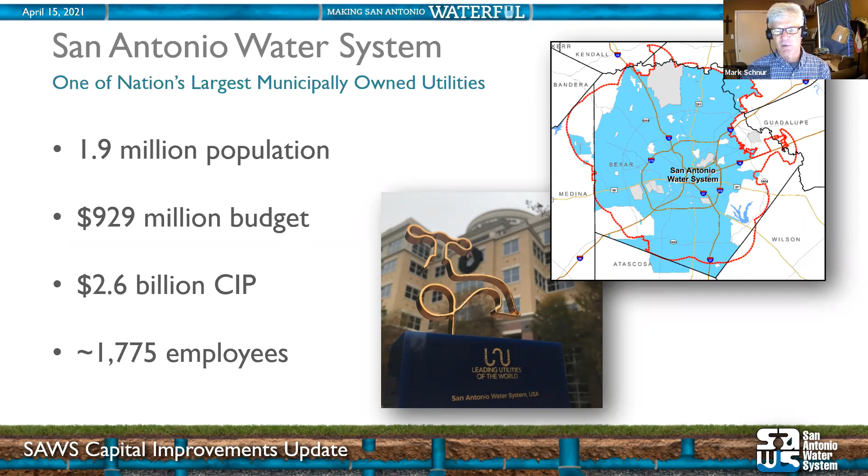A little bit more about our infrastructure. We have 13,000 miles of pipe, that's water and sewer pipe. 182 wells, mostly in the Edwards Aquifer. 117 water storage tanks, some elevated, some on the ground. If you drive around, you won't go very far on any of our streets or highways without seeing one of our water tanks. There's 154 lift stations, and most of our system runs north to south downhill towards our treatment plants.

You see the Steven M. Clouse treatment plant on the right down at the very southern tip of Bexar County. But the lift stations, when there's a rise in the pipe or we need to go around or over something, we put in a sewer lift station, and that keeps the wastewater flowing downhill. There's 3 large treatment plants. I mentioned the one on the right is Clouse, formerly known as Dos Rios. We also have one at Leon Creek and a Medio Creek treatment plant, and those take care of all the wastewater from all 1.9 million people.

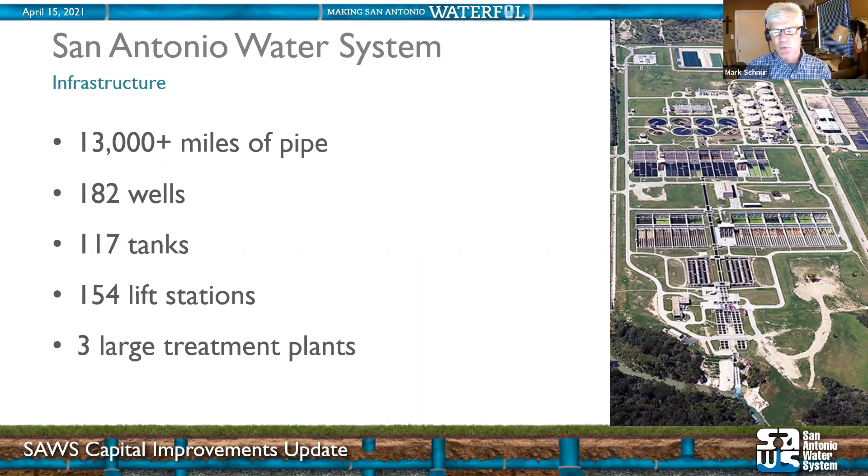Project controls, that's my team I'm on. We live in engineering and construction. We focus on scope, schedule, and budget. In other words, keep projects moving. We attain and sustain a high level of project success by focusing on those project schedules and budget, maintaining the scope to try to minimize scope creep, and meeting our stakeholder expectations. Our stakeholders are both in the organization with our operations staff and then outside. The city of San Antonio, indeed, every citizen that we serve is one of our stakeholders.

We do leverage technology quite a bit. Since I think 2012, we've implemented and used constantly our contract and project management system, CPMS, that we have for contracts. We can quickly determine the status, asset information on each and every piece of sewer pipe in our system to meet our EPA consent decree. And we also use Primavera P6, a project schedule that interfaces with some of our other software, namely Tableau. We have a Tableau dashboard that helps us visualize through pretty cool charts and graphs where we're at on any given project or any piece of sewer main in our system. So we heavily use technology.

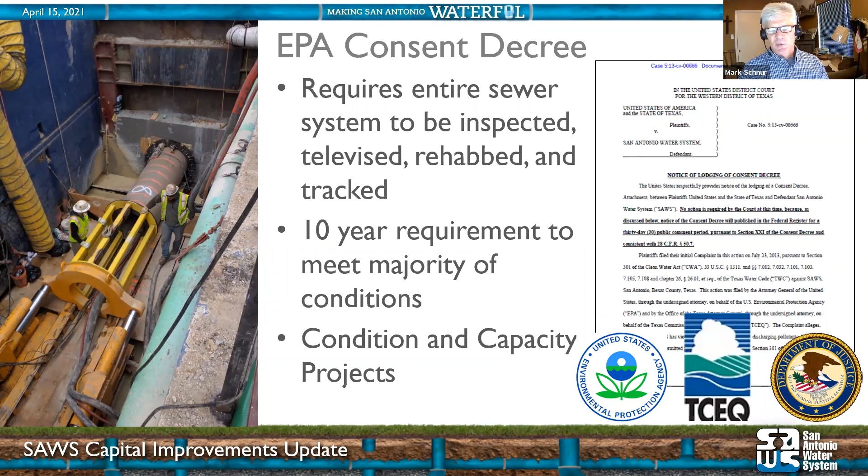So the timeline, as you saw, started in our first full year, 2013. In 2025, we see it winding down. However, as I mentioned, the capacity and condition remedial measures projects will be finished by then. But the CMOM, which, if I recall, is capacity, management, operations, and maintenance, will continue well into the future.

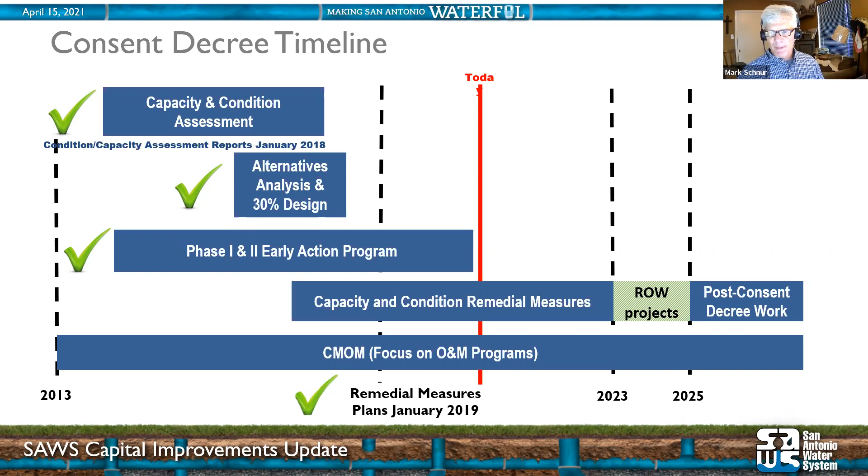One of our big projects right now, you may have heard of this. It's the most costly and complex sewer pipeline project in our history. We have over 5 miles of up to 104-inch gravity sewer main, at a depth up to 140 feet. If you notice the graphic on the right, it goes around Lackland Air Force Base, along Highway 90, down Southwest Military, and ends up south of the base. We tried going through the base, but it was obviously difficult going through a military base, especially one with an active runway. So we finally worked up a solution with a lot of help at very high levels in the federal government to go around the base.

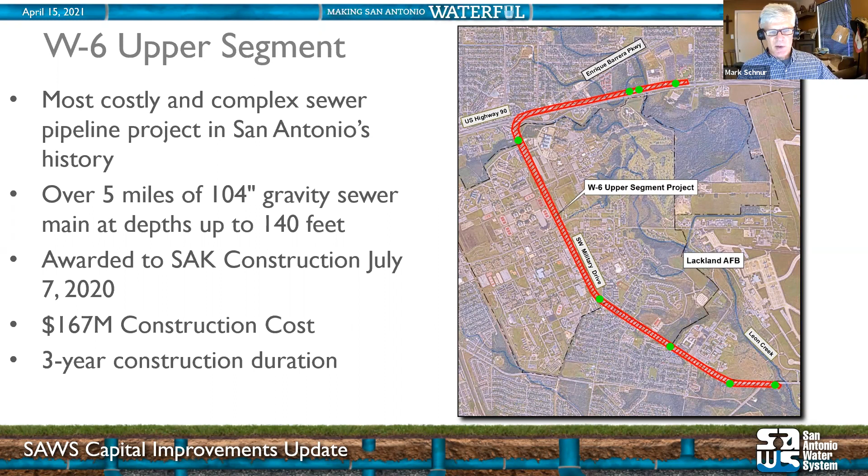The green dots are tunnels where they've bored tunnel shafts down up to 140 feet to work on the pipe down that low, because obviously you can't, and wouldn't want to, dig a trench 140 feet down. So they're doing tunneling with giant tunnel boring machines, and we're over 30% done on that project. We're ahead of schedule, which is a really good thing, and we expect that progress to continue so we get it done within that 3-year construction duration.

It's a $167 million project. There's some pictures you can see. In the upper left, that's one of the tunnel shafts. That one doesn't look as deep, but some of them are. On the lower left, you can see one of the tunnel boring machines. And then some other cool pictures with the railroad tracks underneath, in those sewer pipes where we're installing the new sewer pipe. And people standing by, in that center right picture, a very large tunnel boring machine. That guy in the foreground is our Chief Operating Officer, Steve Clouse. He's my height, if not a little taller, at 6 feet, so you can see the TBM is probably a good 10-foot diameter machine.

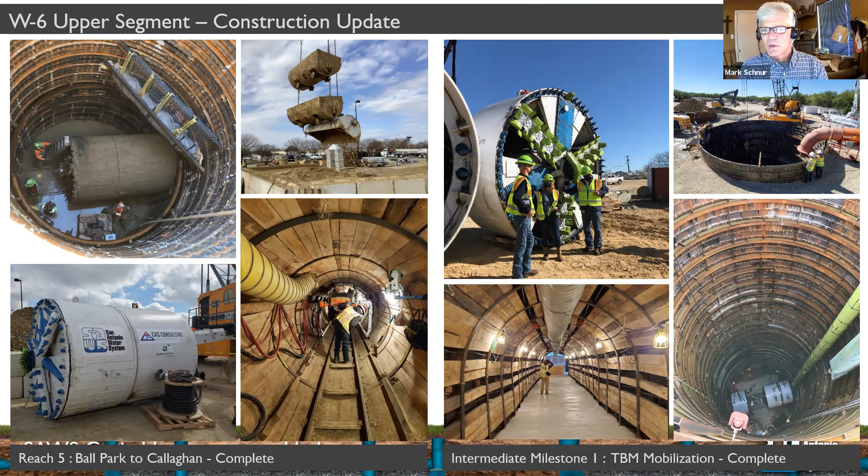Well, let's see, let's move on. Okay, some more projects. I see there's some questions coming in, and I'll take a moment here and answer those.

WRIP, Water Resources Integration Pipeline Phase 2. That one went all the way around the west side of the city to bring water up from one of our production plants down on the south end, and also down there is our aquifer storage and recovery site, to bring water up to some pump stations on the west side and up near Anderson Pump Station, close to the northwest side, to feed a very rapidly growing part of the city.

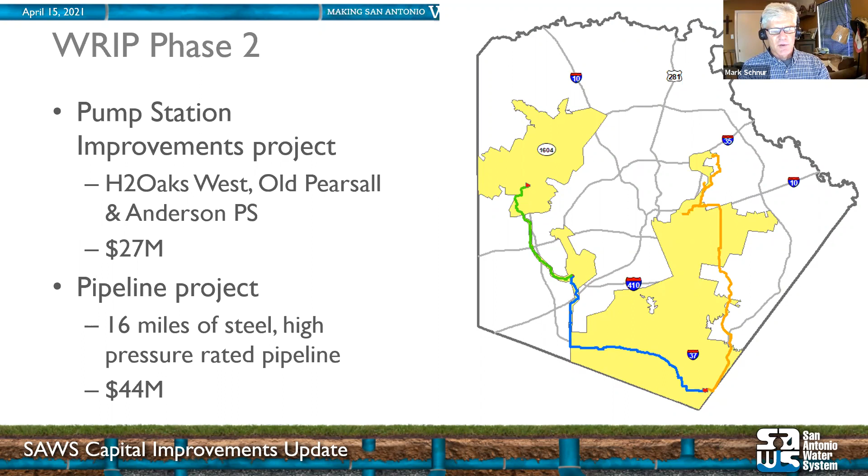There was 16 miles of steel, high pressure rated pipe at $44 million cost, and then a couple of pump stations that we built for $27 million. So again, a large project.

If the moderators don't mind, I'll quickly answer a couple questions. How much of the sewer main network still needs to be rehabbed? I don't have a quick answer off the top of my head, but we're over halfway, and that project will continue. We're making great progress. The EPA has even publicly congratulated us on a really good program to meet the demands of the consent decree.

How often do sanitary sewer overflows occur in San Antonio? Right now, since it's been so dry, not very often. Typically rain will cause one, and obviously blocked pipes or poor condition pipes will cause one, but normally with low flows they don't occur very often. I don't have numbers off the top of my head, but the incidents have come down dramatically in the past few years. If you look at our website, we post when one occurs, since we're required to by law and it needs to be public information.

What do we do with all the dirt from the tunnels? I don't know for sure, but a lot of it, if it's not contaminated, they truck it away. I don't know where, but if it is contaminated, then we have to take special precautions with that.

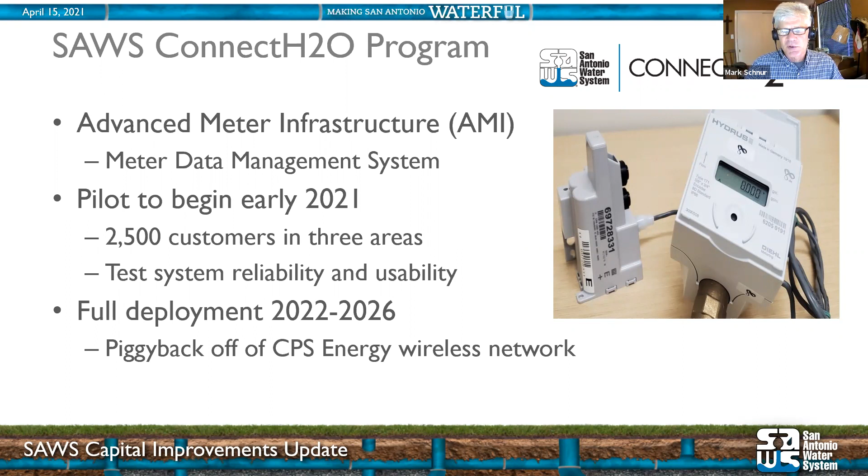It'll be pretty neat when fully operational to piggyback off the CPS Energy wireless network, so we didn't have to build our own. It will give us terabytes of data, so I anticipate we'll cross-train or hire new staff to manage and make sense of it. I'm pretty excited about that project—it's funded for construction in 2022, so we'll see that coming out next year.

Okay, the wastewater master plan. I mentioned our 4 treatment plants, shown in green there. The Salado Creek plant is decommissioned, though we still own that land, and at present there's not much infrastructure there. The other 3 operational ones are Dos Rios—actually named Steven M. Clouse now—Leon Creek, and Medio Creek on the far west side.

That master plan evaluates the existing conditions and infrastructure at all 3 treatment plants, which we call water recycling centers. It'll give us a solid capital improvement plan for the next 20 years, which, from putting together our capital improvements plan for many years, we really need for better stability and to keep the infrastructure well maintained and operational. For instance, the Dos Rios or Clouse treatment plant, our largest, is about 25 years old, and infrastructure needs to be maintained over time to continue leveraging technology like SCADA systems.

That plant averages about 80 million gallons a day of wastewater, so you really need robust infrastructure to treat it all and meet environmental standards. The master plan is expected to be finalized later this year, and hopefully it'll provide input for our capital improvements plan for next year and the following 20 years after that.

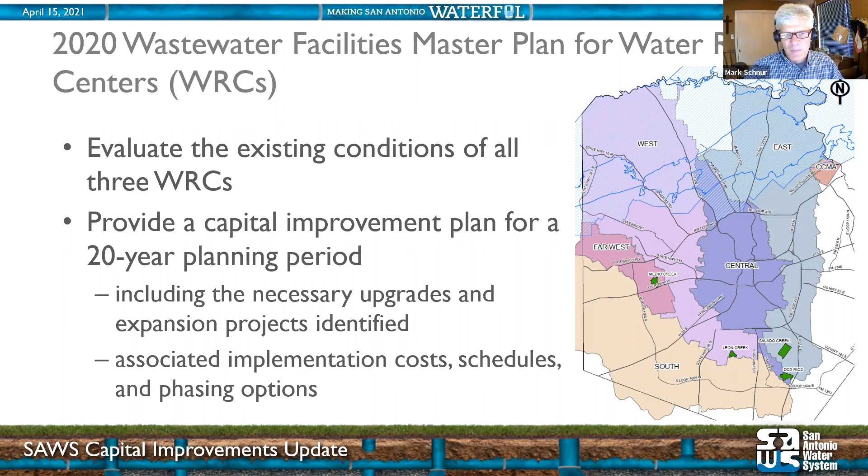And we don't just do wastewater, we do water also. This program is actually in its final stages now. We're actually implementing some of the projects that came out of it, and it was to do a water main rehabilitation, risk-based rolling 5-year capital improvements plan.

We looked at city streets. Well, our consultant looked at city water mains throughout the system and said which ones are the highest risk for failure, and they came out with some good projects that we actually have. We're designing some of them right now. We'll see a lot of them go to construction in the next year and the following years.

This is pretty nice. I saw some of the presentations and looked at some of the models they built that used machine learning and field condition assessment, came out with useful life calculations. It considered triple bottom line of social, economic, and environmental. It gave us a risk score, the likelihood of failure times the consequence of failure times the redundancy, came up with a good quantitative risk score.

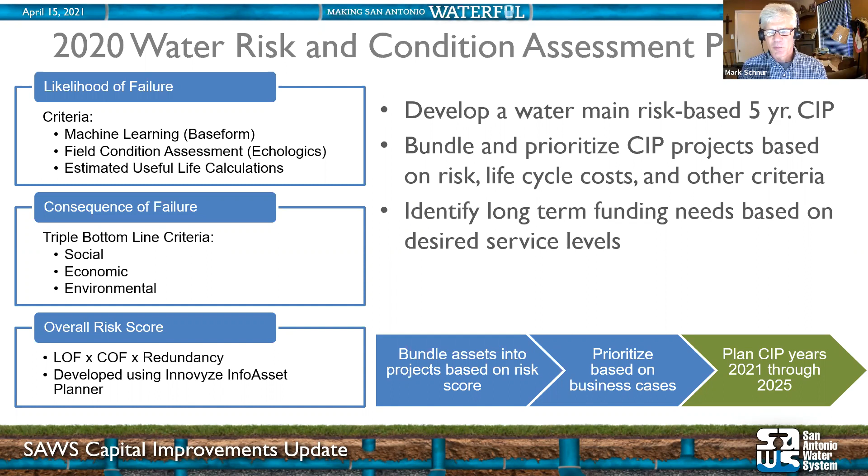And they used some cool software by Innovyze called InfoAsset Planner to come up with that. And that program is now giving us a really solid water main rehabilitation capital improvements program. So again, technology helping us identify the highest risk water mains in our system, and now we have a good program to implement in our capital improvements program to rehab those water mains.

Okay, so here's what I know you all want to see: dollars. That's our capital improvements program 2021 through 2025. It averages about $515 million. We're looking at some big years. 2020 was actually 600 million.

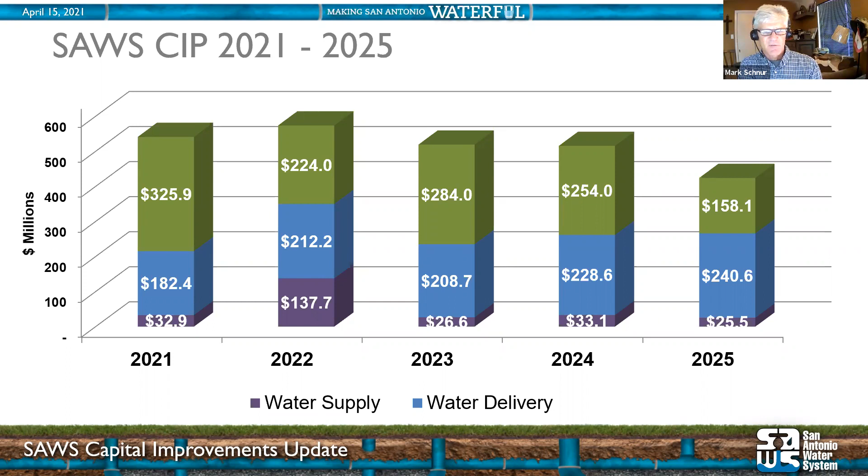Some of these, I think, we couldn't get Excel to put the totals at the bottom of the chart, but 2022 is right now sitting at 574 million. And if you'll jump forward a slide, I'll show you 2021, the year we're in right now that we're executing. That was 541 million, so lots of money.

Most of it construction with 486 million, and then about $20 million of design, and 70% replacement of old aging water mains and other infrastructure, and then 30% growth to meet a rapidly growing city.

Obviously, wastewater, 326 million to meet the demands of our consent decree. Water, 182 million for pipes and pumps and tanks, and then water resources, that was like the water resources integration program and other water resources projects. That's new water supplies, 33 million.

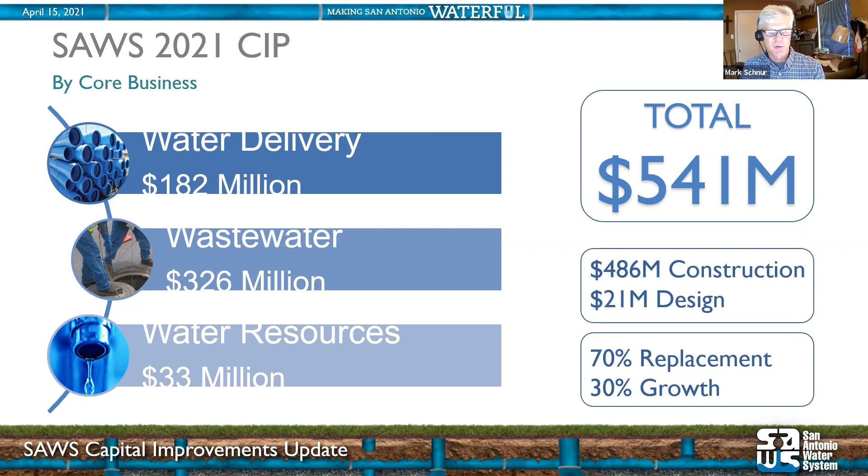So I'll go through each of those in some high level detail and some specifics on each project. Water delivery pipelines, that's obviously water pipes, 62 million. Facilities, about 79 million, that's pumps and tanks. And then governmental replacements, we do about 28 million along with the city, TxDOT, some Bexar County every year.

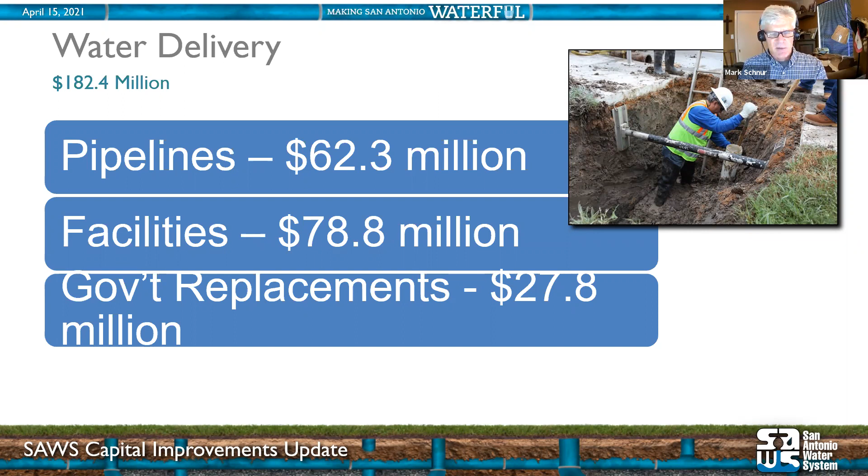So our infrastructure program is tightly integrated with the local and state governments, the roadways and all that they maintain. Here's a few projects. Turtle Creek number 3, tank and main, $35 million tank and water main. That feeds the medical center, obviously a very important area to the citizens here, to make sure that we give them adequate water supplies.

We are looking at removing chlorine disinfection from some of our key water pump stations, especially in developed areas like down on Market Street. Last thing anyone ever wants is a chlorine release, accidental chlorine release, which can be deadly. And so we're upgrading those to on-site sodium hypochlorite, a much safer solution to disinfect the water.

And then there's one of our water main replacement programs, 12 million for 4 aging neighborhood water mains.

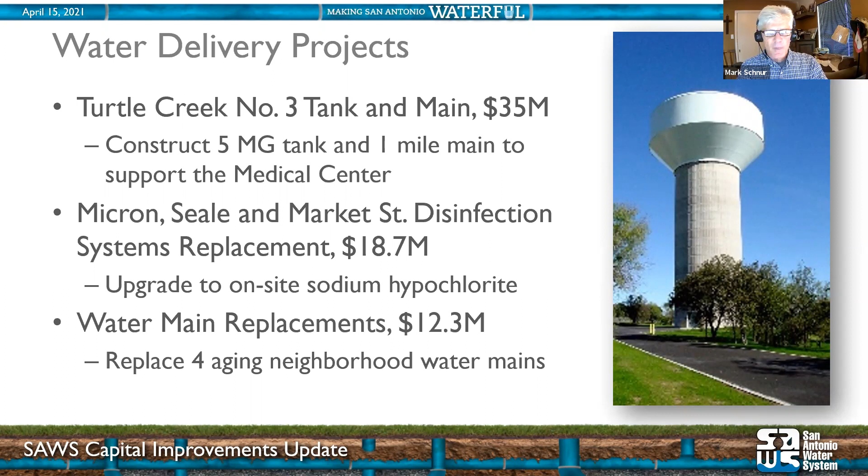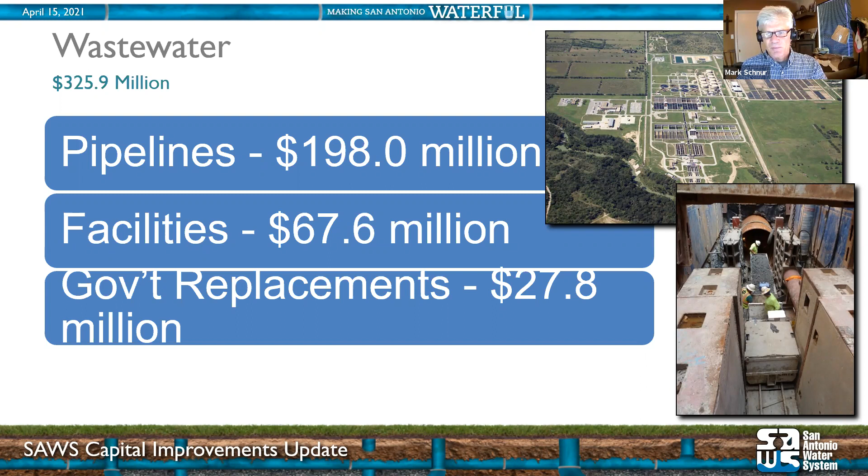So that's a big line item there to meet the consent decree, small and large diameter. That's a bucket of projects: inflow reduction to reduce the I&I, or infiltration and inflow, into our sewer pipes. When they crack or break or whatever, water flows in sometimes through manholes, and that is just more water we have to treat, and we don't want to, don't need to. So sealing up those pipes will ultimately reduce the amount of projects we have to do at our treatment plants to treat water.

And then CMOM, that's the ongoing work beyond the consent decree, 2025 and beyond, to continue to rehab old sewer pipes.

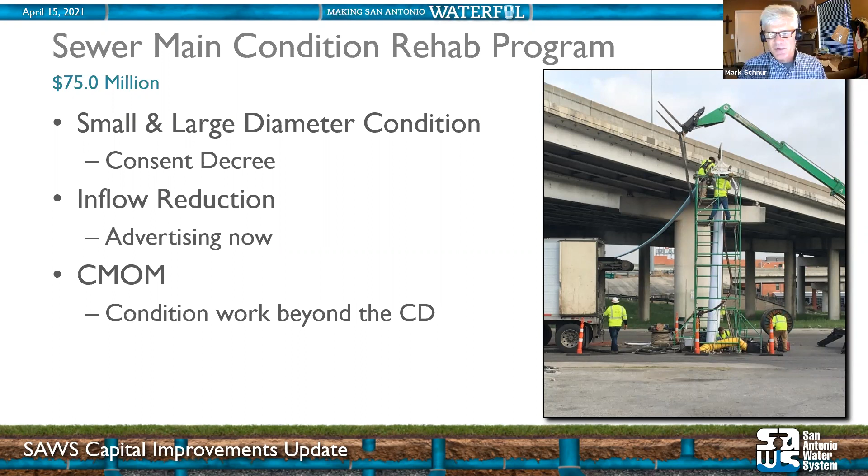A few more sewer main projects. W2, on the west side, in green, Eckhert to Bandera, is 2 miles of up to 42-inch sewer main. Some of these projects are advertising now too, so if you go to our website, I'll give that to you later, you'll see where you can look at those projects. That's $14 million.

E74 on the east side out there off I-10, $13 million. That's a 60-inch inline storage project.

The E54 sewer main, up north of town in that pink color, is about $32 million. That one was actually funded this year. It's a developer project, so there's a lot of hands involved. It'll probably slip to early 2022 award, but we will get that project out.

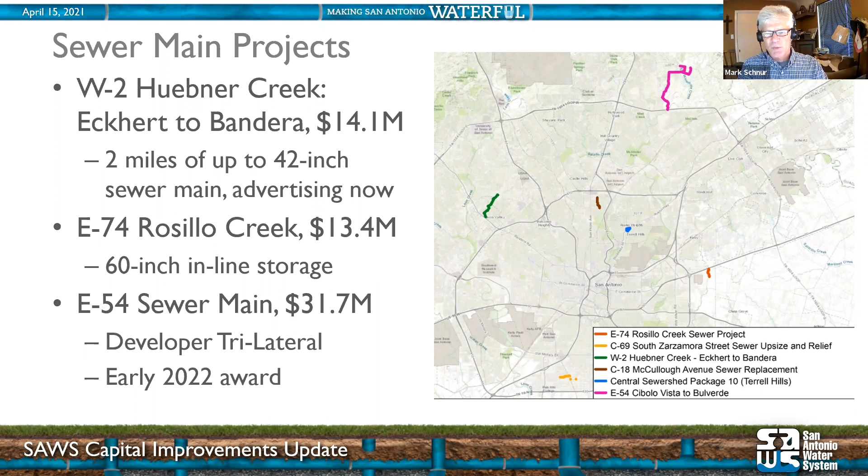A few more. C69 South Zarzamora, $3 million. The small capacity constraints, scattered around town some, are about $10 million.

C10 Terrell Hills, that's the small project there, the blue dot near Alamo Heights and Terrell Hills. Some old sewer mains, some of them I'm kind of familiar with because I live close to there. People built houses or garages over the top of sewer mains, which normally we don't allow, but it happened in the distant past, so now we have to deal with it. We'll probably move some of those out to the street to avoid disrupting any of those buildings.

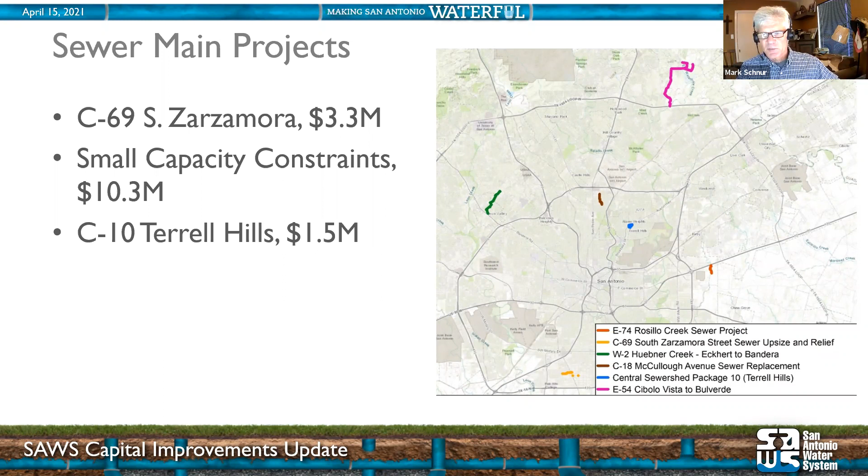So let's go to lift station projects. I mentioned lift stations earlier, about $12 million to rehab 15 lift stations at Port SA, Lackland. That includes SCADA work to network those into our automated systems so we can control it remotely. That's part of the consent decree required by 2023. And then another one, $5 million to eliminate a number of lift stations near Port SA, again required by 2023.

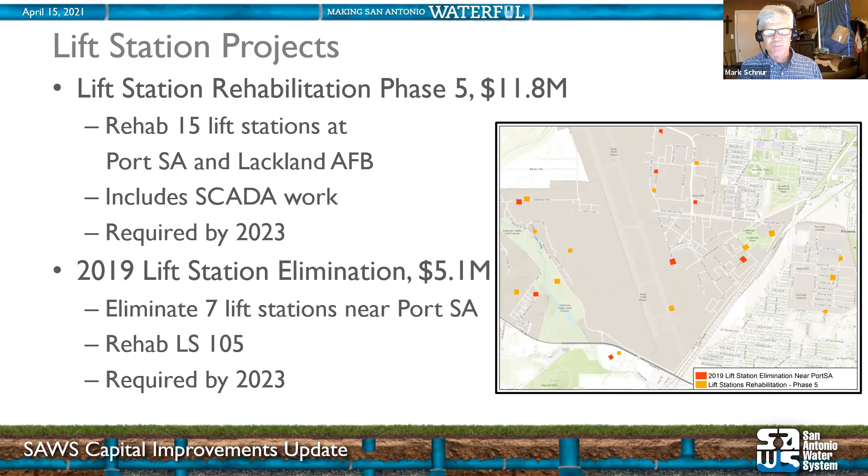Water recycling center, that's the treatment plants, $50 million, all at the Steven M. Clouse and Leon Creek plants, to do headworks and grit improvements. We're getting a lot of grit in the pipe, which is causing some early wear and tear to the infrastructure there. Digester mixing, there's very large anaerobic digesters there, and we need to upgrade some of those because obviously those don't get better with age.

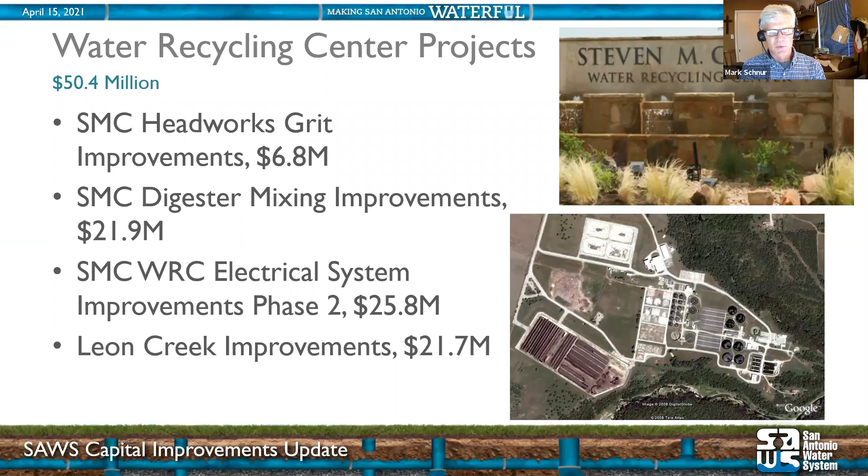Electrical system improvements, that project's been one we've been working to get out for quite a bit of time, to upgrade some of the old electrical infrastructure there, $26 million. And then Leon Creek, a number of different improvements to that treatment plant, the one you see in the lower right of the slide, $22 million at Leon Creek. We have to keep all of our recycling centers running well and fully capable, so we end up having to put quite a bit of money into those two.

There's an inside picture that looks like a spaceship of one of the digesters. I always like that picture because it looks kind of cool. That's the digester project for $22 million. Clean them, install new pump mixing systems, do repairs to the domes, liners, bases, overflow lines, and the electrical and SCADA work will all be done with that project, about $22 million.

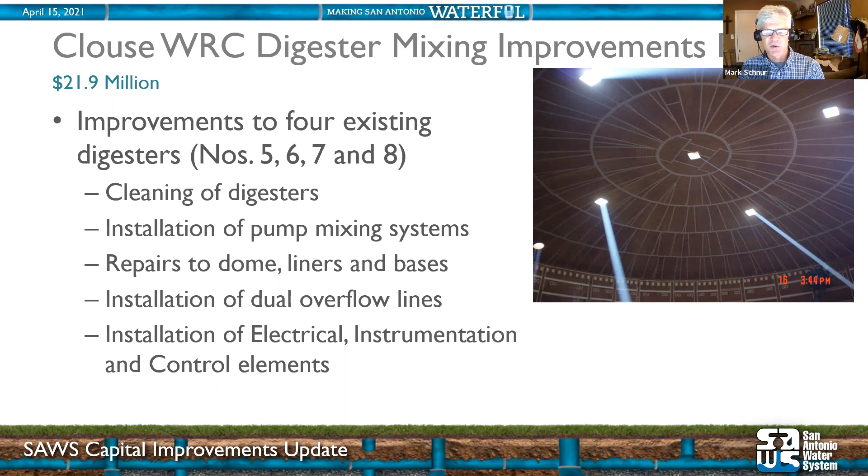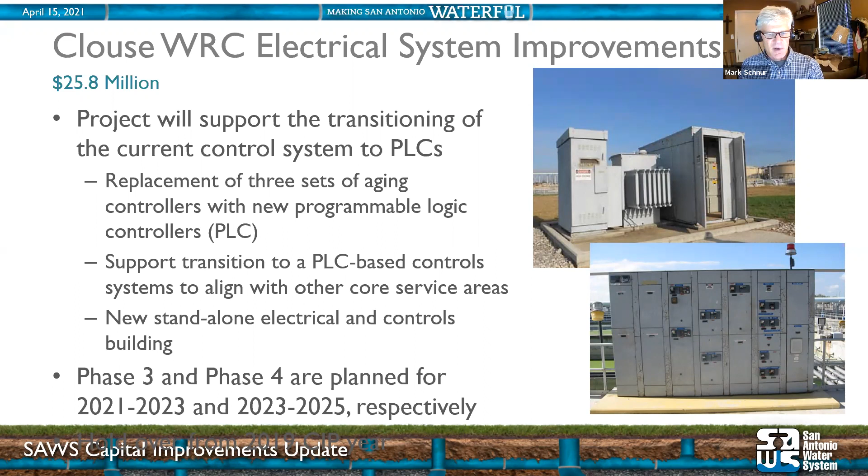There's the electrical system, you see some old duct banks and all that. Some of that is no longer maintained or supported by the manufacturers, so obviously it needs to be upgraded so we can continue to rely on it. We're transitioning those from the current control system to PLCs, programmable logic controllers, which will interface well with some of our other infrastructure and control systems. This is phase 2 of a 4-phase program that right now is planned to conclude in 2025, so there'll be ongoing work on that.

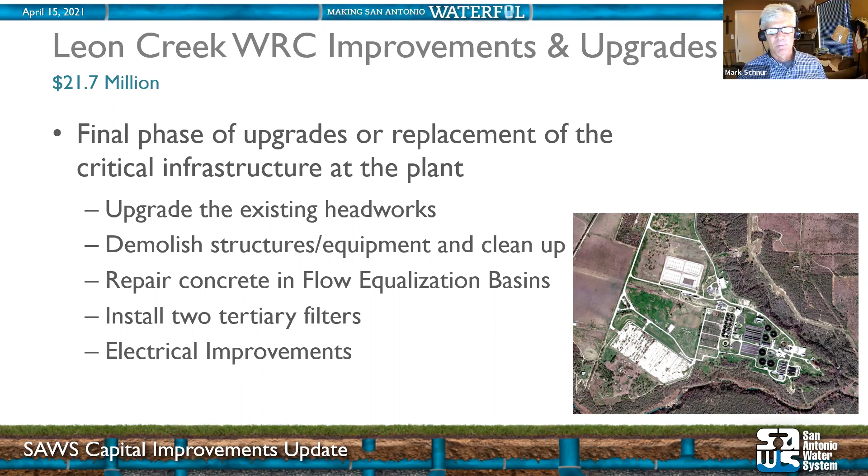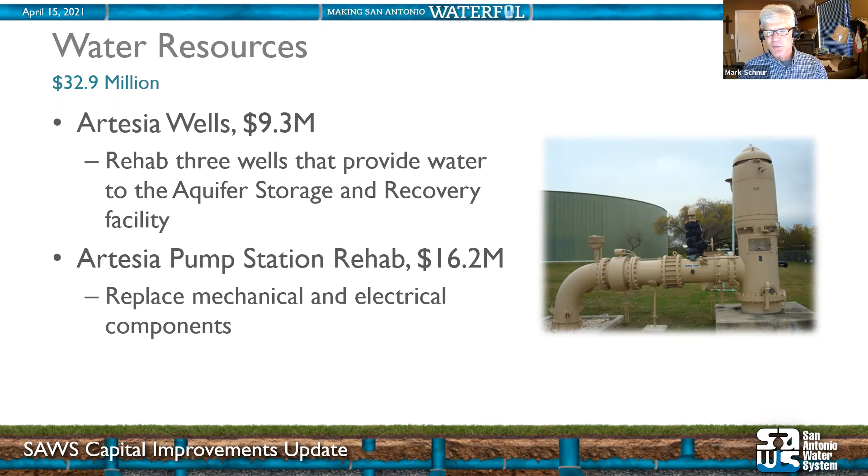I saw a question about Vista Ridge, and we just finished the Vista Ridge project. How does our program integrate with it? Well, it's all integrated. All of our water sources are closely integrated and controlled remotely too. So we don't just bring on one water source that feeds one small area of customers. It's all integrated throughout the system.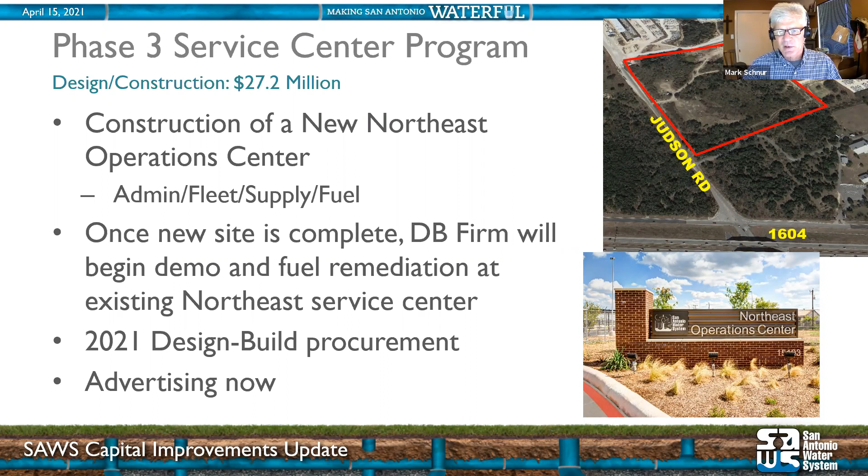Obviously you can see the site needs to be cleared. The design build firm will begin the demo and fuel remediation at the existing service center to transition and move those fuel facilities over to the new one. I believe it's advertising now, so if you take a look at our website, you can look at the specs on that and hopefully get involved and help us out.

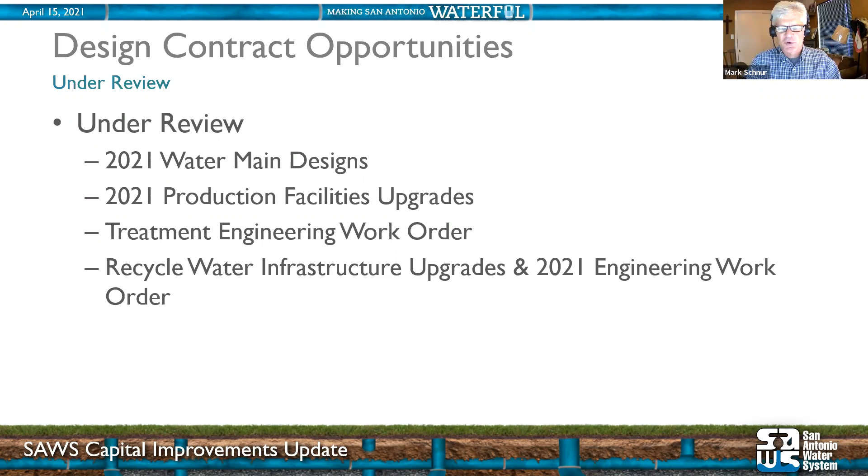There's a number of design contract opportunities right now under review: water main designs, production facilities, treatment engineering work order for small treatment jobs we need help with. And then we're also paying attention to our recycled water system to upgrade some of that infrastructure and do some engineering work on that.

So there's some opportunities that'll be coming later this year. W9 and W52 are two large sewer mains on the west side. They're some of the largest and final projects we need to do for the consent decree. So those are design dollars, and there'll be some fairly large or very large construction projects too.

The CMOM, that's the sewer condition rehab. We aren't sure - we're intensively studying that right now because we're just ramping up on it, how much work we'll be able to put out later this year. It will definitely continue into 2022 and years beyond. So if you're interested in helping us out with some sewer condition rehab, pay attention to that. We'll need design and construction help on that.

A couple of water pipelines - there's a couple of the larger ones. Project 3 I know is out along I-10. It's a large water main there. That's design, again those are design dollars, so those are some very large construction projects too. And then treatment facilities at Clouse treatment plant, electrical phase 3 and blower system improvements - we'll need help with facility design work too in the near future.

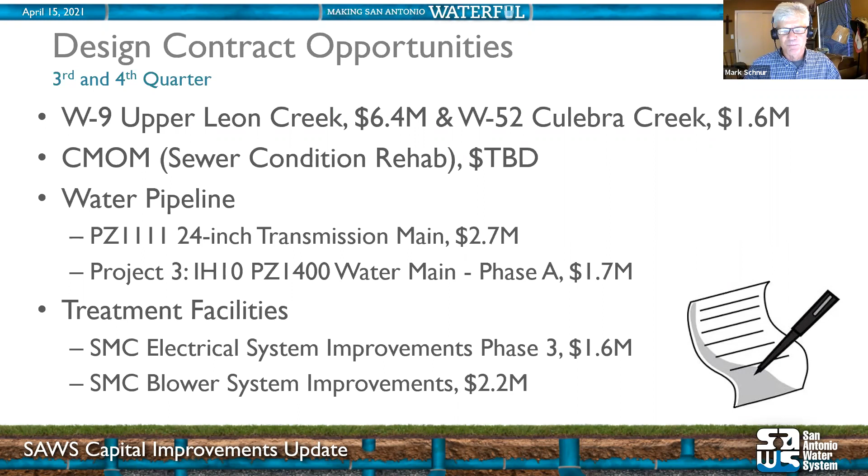We have some updated construction specs, they're on our website. Our utility service regulations that specify how we provide service to new customers is under final review now. It'll come out later this year. All that's on our website, and I'll give you that link here in a moment.

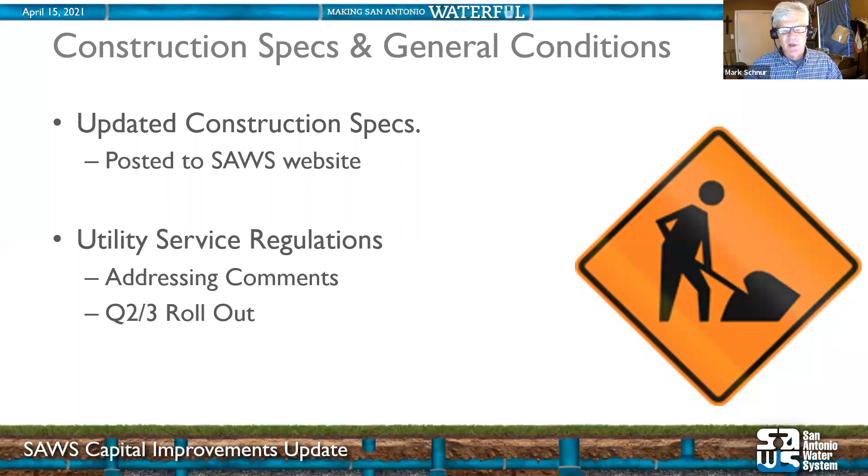If you're interested in small, disadvantaged, women-owned businesses, veteran-owned businesses, there's a link at that same page where you can get information on that, and we definitely actively seek participation on the SMWB program.

Let's move forward one. Looking forward, beyond this year, I mentioned the water risk and condition assessment - that'll give us some water mains for replacement in future years. Likewise, the wastewater master plan gives us a 20-year look at what capital projects we need to do. The sewer main replacement through the CMOM program will continue indefinitely, forever. So obviously we have to continue maintaining our sewer system.

And then the CIP plan, we're expecting it to average approximately $500 million a year. We do work - and that's a big part of my job - to reduce and keep the plan manageable, make sure the right projects are in the right years, the most important projects, because that ultimately ends up some years, not this year or next, but we have to request rate increases approved by the city council. But we do work to make sure that we are optimizing our plan to reduce and mitigate the impact on our ratepayers.

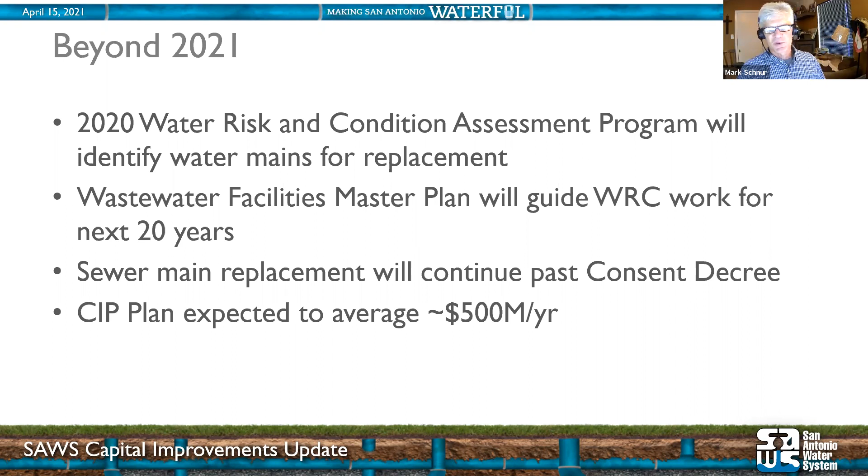So, I'm going to switch gears a bit here. This is talking about things we saw and experienced and had to manage during the freeze back in February. It's hard to imagine now that just barely two months ago there was snow on the ground and it was 10 degrees, but it did happen.

This wasn't even the worst day. This was on Tuesday, but it shows where our water service was out. We helped squelch the rumor that we had intentionally shut off water systems. What happened was, when the power goes out, we can't pump water from the aquifer and fill our tanks. As the tanks drain, the pressure goes down, and then you're out of water. At one point I heard a statistic that 60% of the whole system was out of water. That's pretty dramatic. That's scary.

Nonetheless, within a week we got everything back online. But at one point, you can see on Tuesday, red was out of water, yellow was low pressure, blue was good pressure. That aligns pretty closely with where our pump stations were, and where we could pump water, or in some cases just rely on water still stored in the storage tanks.

I'll give our IS folks a nod. They developed this in just a matter of hours to get really detailed views on where water was available and where it wasn't. We were working full time throughout that week of the freeze, and most of us again did this working remotely from home.

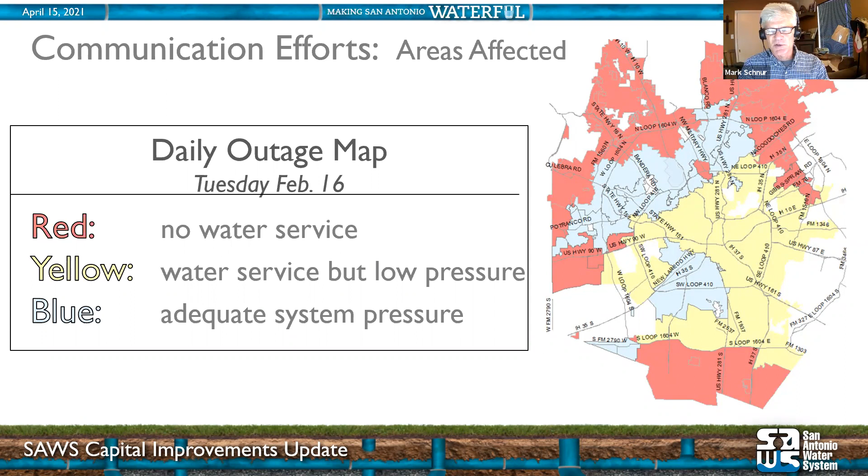If we can jump forward, there's some pictures where we still have items outstanding. This slide's actually about a month old, but we're still working to repair some infrastructure. You can see on the left and middle, cracked large pipes and valves—they cracked because the water froze inside them, and like any freezing water, it expands, and even hard steel pipes and valves, it would break them.

The one on the right there, water spewing out from the bottom of that above ground valve. Most of our water infrastructure, except for the tanks, is below ground, the pipes, but sometimes we have to have valves up above ground to be able to control it and shut it off. Some of those are pressure reducing valves too.

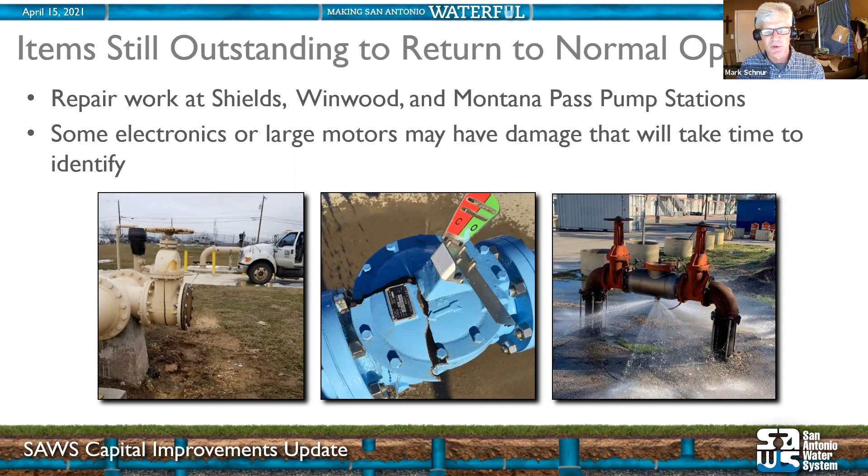There were three critical pump stations. We quickly helped man temporary bulk water sites. I was at one of them myself at Shields Pump Station, and a lot of grateful customers came through.

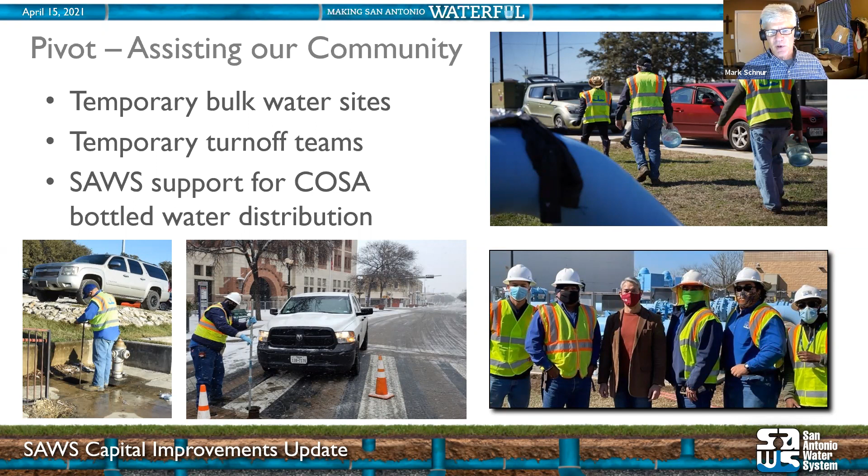We had people on duty 24/7 during the freeze to do what they could. You see guys turning off valves where the water had to be shut down to enable us to either reroute it to where it was most needed, or in case of a broken pipe, isolate that temporarily. So we were on duty throughout that week, whether working in the field or remotely, trying to keep the system running.

There's some more, just a quick slide I borrowed. Initial estimate was 14.8 million that we submitted to FEMA for reimbursement request, again to mitigate the impact on our ratepayers. About $11 million in equipment damage, buying bottled water that we distributed, and materials and other almost 4 million. And obviously some crews were working 24/7, had to feed them, 400,000.

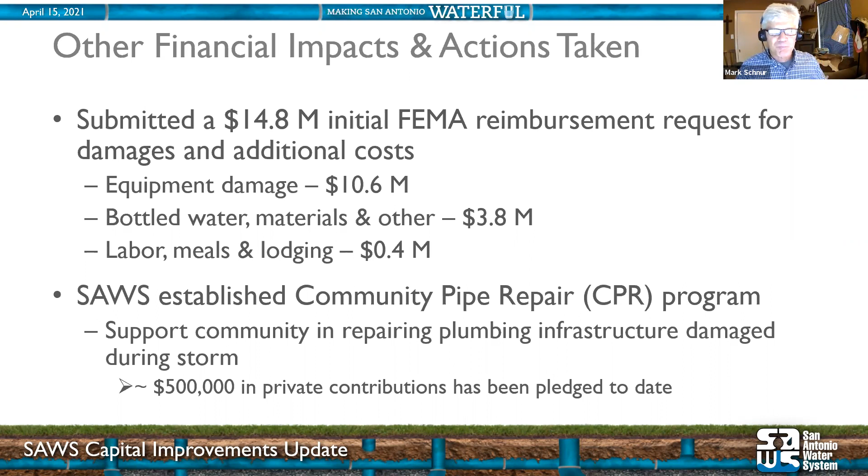I'm proud of this one too, that our leadership established the CPR, or Community Pipe Repair Program. A lot of us at SAWS and other community businesses donated over $500,000 in contributions to support people who needed plumbing repairs. So we did our best to step up and help our community.

This slide was dramatic too. An average February day, we'd pump 175 million gallons—winter day, nobody's watering their grass. The previous all-time record for daily supply was a hot day in June, middle of summer, 378 million gallons. During the freeze, with a lot of people dripping their faucets like we told them to, and broken water pipes, we hit 441 million gallons on February 18th, more than 2.5 times the average February day.

So the freeze was dramatic. It definitely affected us, and we bounced back quickly. By that Sunday, I believe we had everybody in the whole system back online with water. So we did react quickly there.

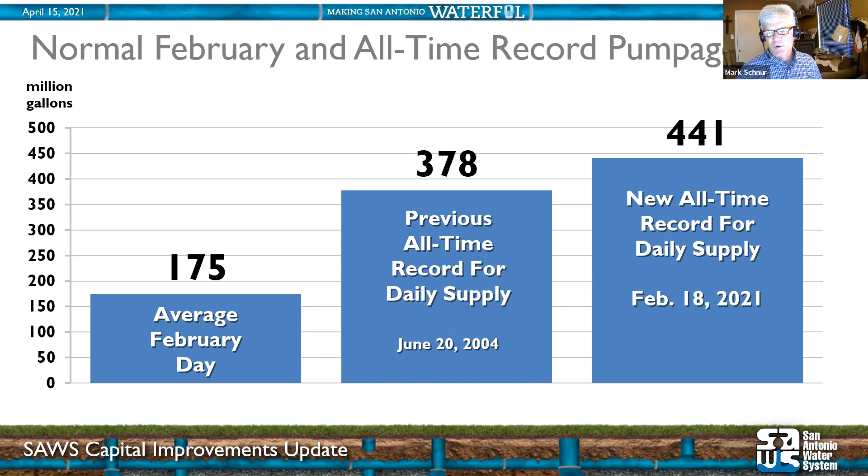That's my last slide. I think I saw one more question: in light of the February 5th cyber attack at Florida, what is SAWS doing to increase protection of the system?

Well, those are some IS things that I'm not very smart about, but we do have a robust IS team that monitors attacks constantly. In fact, when I happened to be at the water distribution site with one of those guys, I asked how often do you get attacked? And he goes, constantly, every day. So we're not immune to that.

We do have the latest technology, and even working remotely with my work laptop, I'll get a message about every week or so that I need to reboot to get the latest security update. So we're on top of that. Thankfully, we haven't had any disruptions—nothing serious, nothing that knocked us offline, and knock on wood, hopefully it'll continue that way. So we do our best to stay on top of those kinds of threats.

So that's my last slide. I'd be happy to entertain any more questions or comments or anything at all.